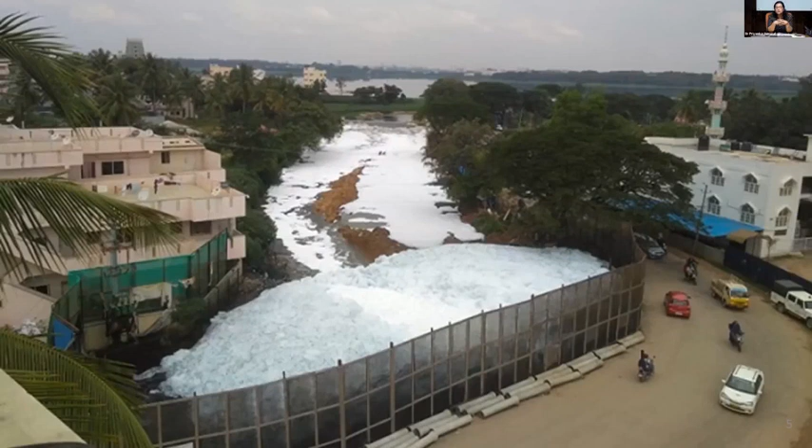In addition to that, the wastewater discharged from the city is used downstream by farmers for irrigation purposes. And we are all aware what kind of health impacts can occur when untreated wastewater, which is a mix of industrial and domestic wastewater, is used for irrigation.

So this is basically the nature of the problem, or the concerning water quality issues, in urban landscapes, taking the example of Bangalore city. Now coming to rural landscapes, what we have observed is that after the Clean India mission, there has been a rampant deployment of

soak pits to dispose of black water, whereas grey water, which comes from bathrooms and kitchens, is not being treated. It is just discharged into open stormwater drains.

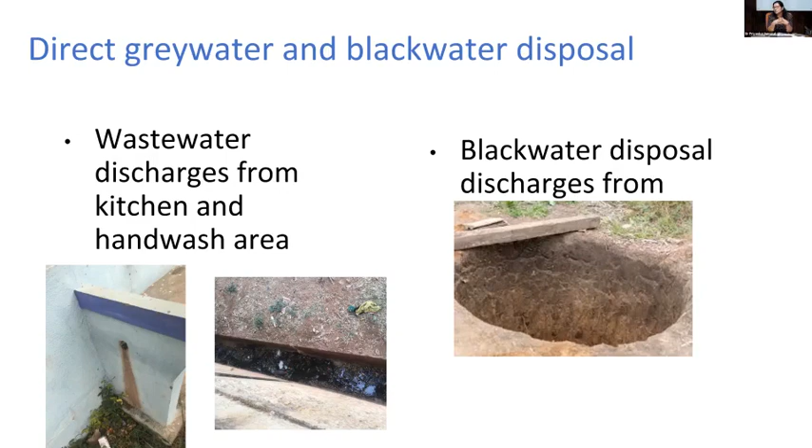You can see here the pipelines coming from households directly discharging grey water, coming from kitchens and bathrooms, into open stormwater drains, while black water is disposed of into leach pits, and the leach pits finally contaminate both surface and groundwater.

And then we see these news reports coming out stating that the groundwater in rural areas is poisoned with nitrate, fecal coliforms, and other issues. So these are some of the water quality issues which we are facing both in rural and urban landscapes.

Then the idea was, what kind of approach can we use to address some of the water quality challenges in urban landscapes? So I will start with urban landscape, and then draw down to rural landscape, showing the demonstration of what we did and how we deployed these solutions to address water quality issues.

So as I showed you, my case study is related to Bangalore city. As I explained earlier, Bangalore had a series of lakes, more than 1,000 lakes. Bangalore city lies on a ridge, and it has 3 valleys, and the lakes are cascading in nature.

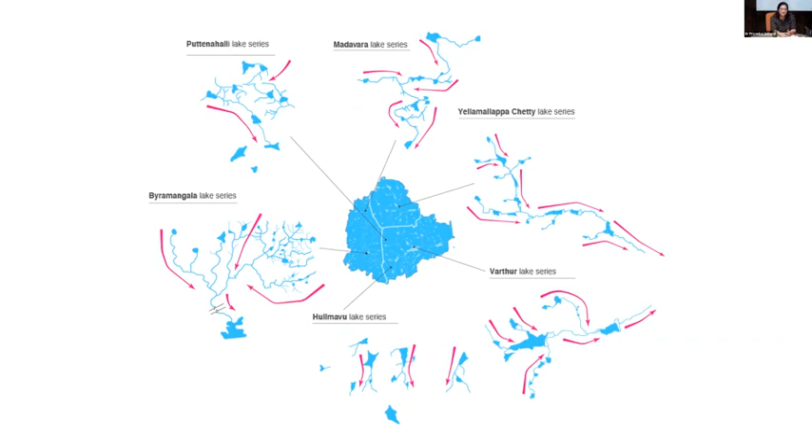So the general response from the government is, okay, let us build another centralized wastewater treatment plant. But the issue with centralized wastewater treatment plants is that construction is very slow. By the time we complete construction, the population has increased by a few million. And they are very site-specific, large-scale, and expensive.

So the idea was, can we have some bottom-up responses where those responses can supplement top-down responses and help in addressing water quality issues?

So as I was mentioning, there are these wastewater treatment plants, both centralized and decentralized, and the effluent from these plants again enters into open stormwater drains, which finally enter the lakes.

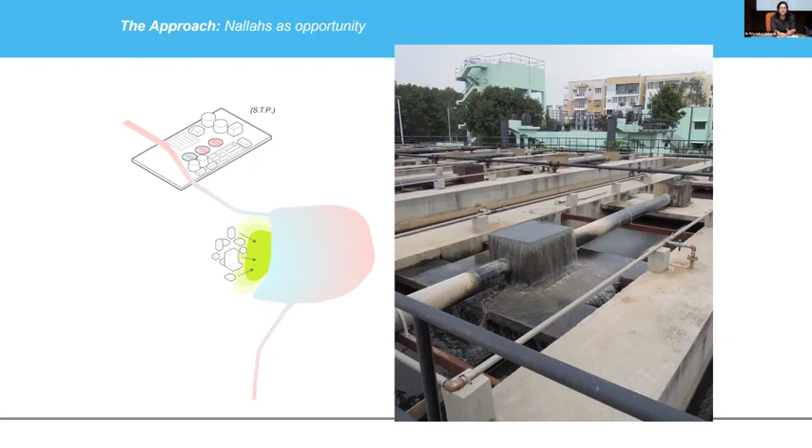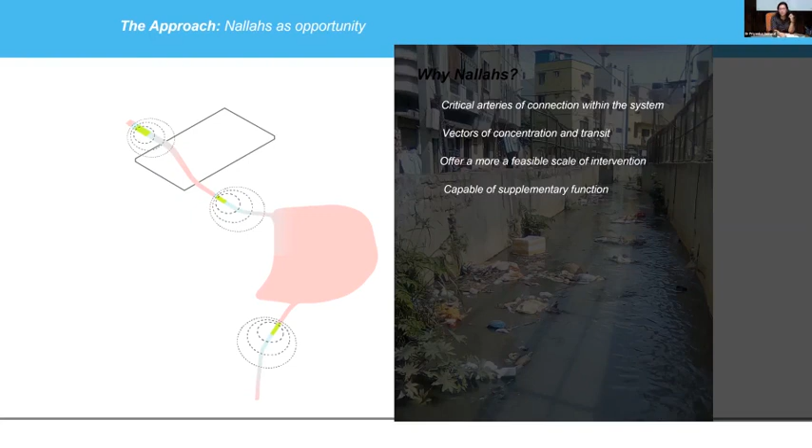So the idea is, these stormwater drains which connect the lakes—can we have some interventions? Can we deploy some interventions at these intersections, which can help in addressing some water quality issues in the lakes?

So the tactic we used was, can these simple in-stream interventions create measurable impacts on the level of contamination within the urban water systems?

Now, they will give us immediate performance. They are flexible, tactical, and can be scaled up. And we want to use cheap materials that are easy to maintain, also with the help of community engagement. So the first thing we did was...

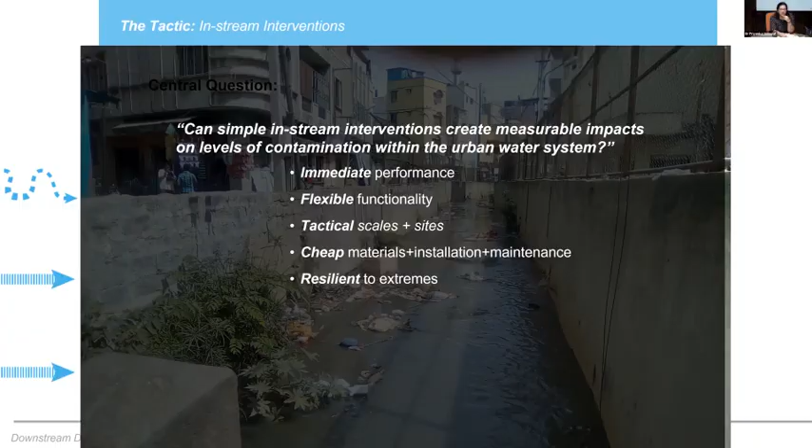So the first thing we did was, we tested—when we say we want to build these nature-based solutions, these interventions—the first thing was, can we test some filtration materials which are cheap, readily available, and which can be used for treatment.

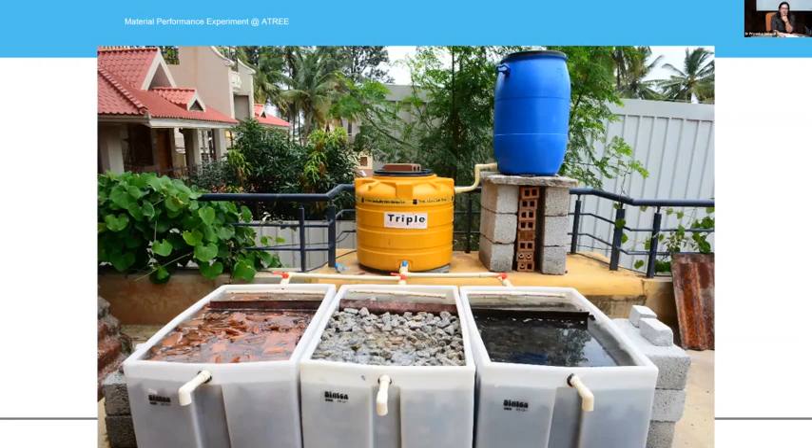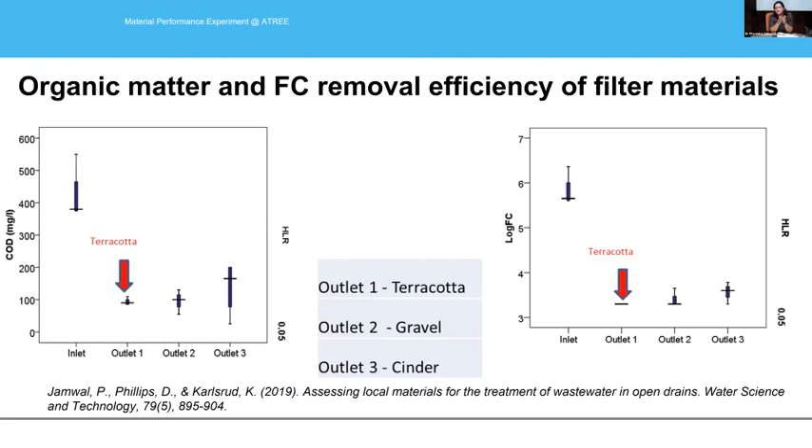So we tested these three materials, terracotta, gravel, and cinder, and we found that terracotta gave us the best efficiency, whereas gravel was giving efficiency comparable to terracotta.

Once we established our work with the lab setups and lab experiments, we collaborated with other institutions and government stakeholders to demonstrate the impact, to have a demonstration site which works under real conditions, because the previous experiments were basically in the lab where synthetic wastewater was prepared and the materials were tested. So now we wanted to test the materials under real conditions.

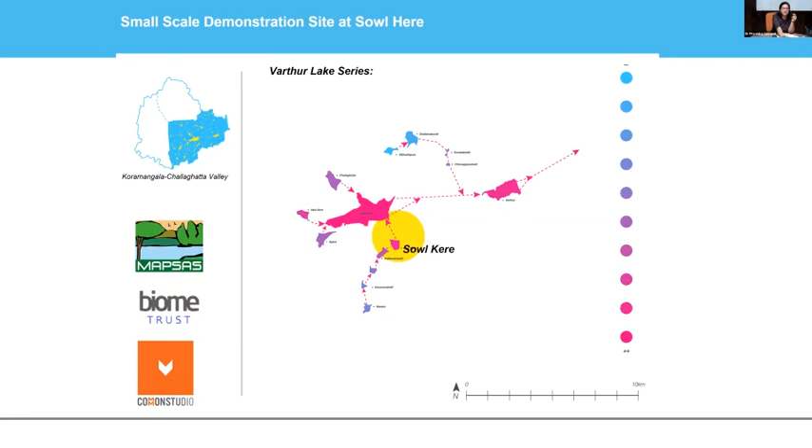So we collaborated with government stakeholders, because we had to seek permission, and we collaborated with implementers and landscape architects. We chose one of the lake series, one of the lakes at Sowl Kere, and did a demonstration. This lake was receiving grey water from the upstream area, as you can see.

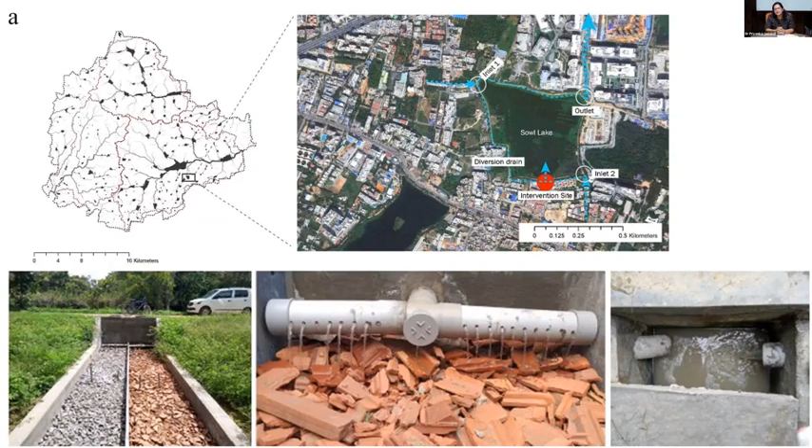So what we did was divert a part of the grey water, and you can see these setups - one with gravel, one with terracotta. We tested this system for 2 years, and the results are already published. We found significant reduction in organic matter content, but fecal coliform levels did not show high reduction because the retention times were too low.

Can we go next, Robin? So, and then next.

The results from this study were used to develop a scenario to test various scenarios at the catchment scale, in one of the peri-urban catchments, where we used the SWMM model to find the optimal locations so that these multiple systems deployed at the catchment scale can give significant improvement and improve the water quality of the receiving lake.

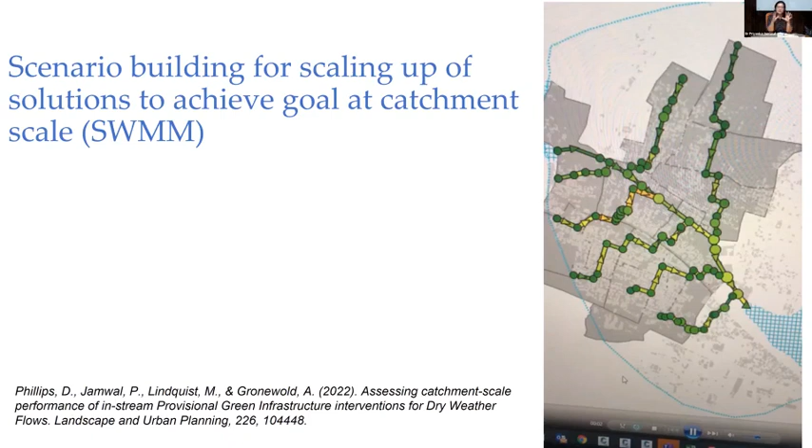Can we go next? So this was the example from urban landscapes. Now coming to the rural landscape.

As you know, 80% of rural landscapes depend upon groundwater for meeting their freshwater demands, and as I've shown previously, groundwater quality and quantity is a major challenge in these landscapes.

For demonstration, this project was in collaboration with the James Hutton Institute and was funded by a Hydro Nation project through the Scottish government. The deployment was done at a school, where the idea was that grey water and black water flows discharged from the school were creating issues with surface water and groundwater quality.

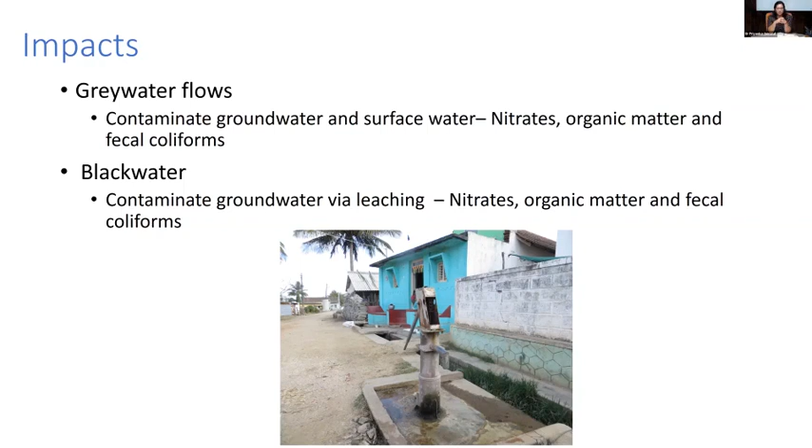We deployed these solutions in one of the schools located near Mysore, a town in India. The school had a population of around 206 students and around 10 staff. The school had issues related to quantity and quality of the fresh water they were receiving.

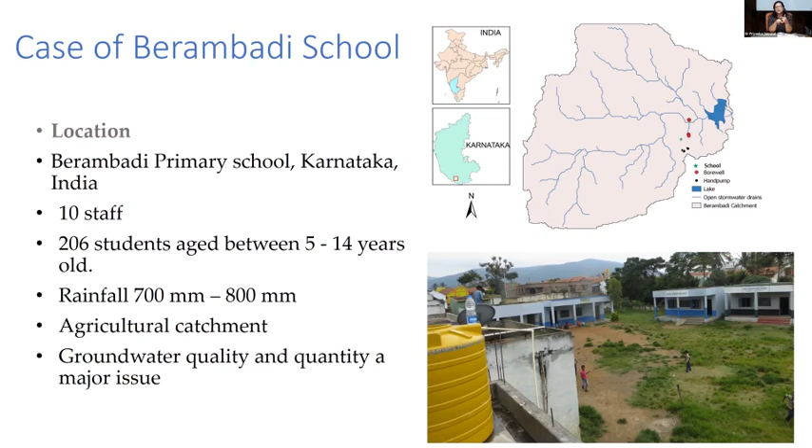So what we did was deploy an integrated water management approach, where the idea was how we can reduce dependence on freshwater sources, reduce pollution of surface water, and also engage the community - because unless we engage the community, sustaining these interventions and their efficiency is really difficult. Community engagement was key to deployment of this project.

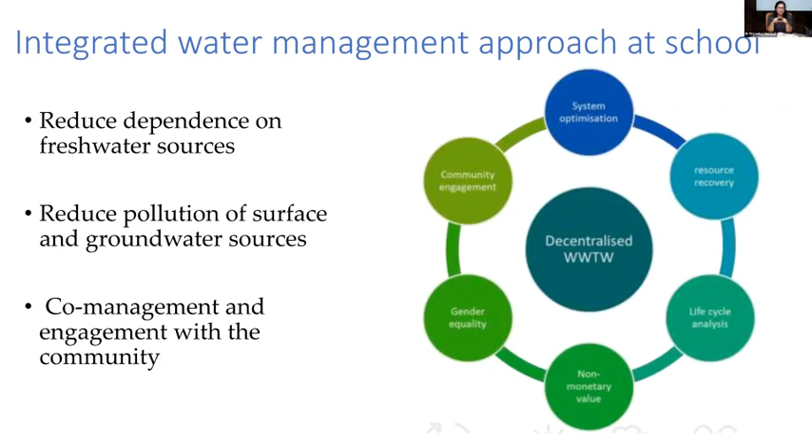The approach we used was that the design of the intervention was guided by a baseline assessment, which had both social and technical components. There was community and stakeholder engagement, and the design was co-developed with children, since they were the main stakeholders. In addition, long-term monitoring was done and youths were engaged, so that the knowledge of this intervention is embedded within the community.

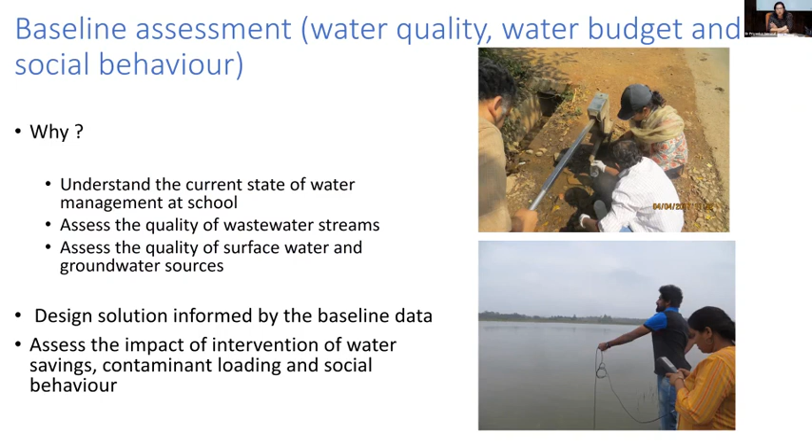For the baseline, we started by looking at the catchment scale, assessing groundwater quality and surface water quality at both the catchment and school level. In addition, we understood the barriers to sanitation through the children - what are the barriers, what are the needs of staff and students - which helped us co-develop the design of these systems.

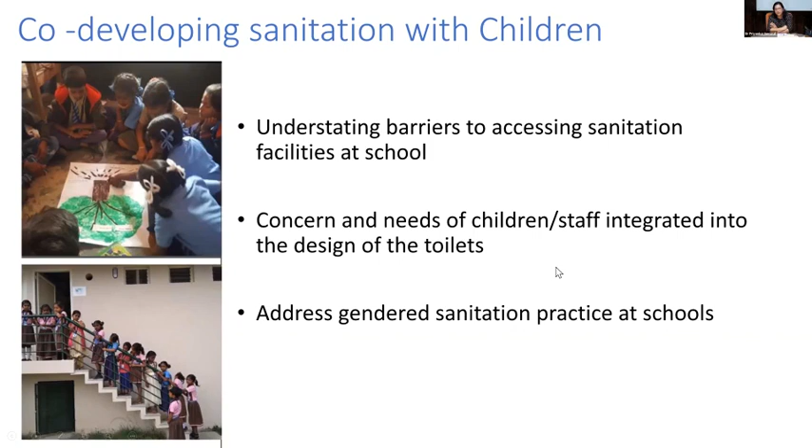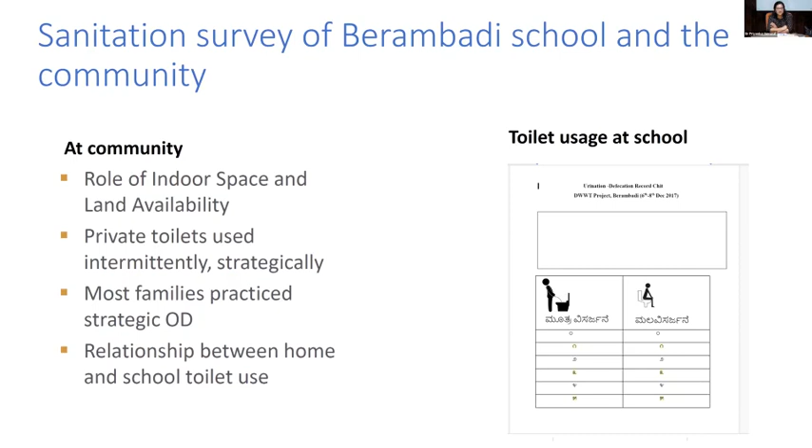We also did a social assessment, because if we want to assess the impact of intervention, it was very important for us to understand the usage of toilets, frequency of urinating, and other key aspects important for designing these interventions. Once we understood the baseline, the data was already published, so if somebody wants a deeper understanding of what we did, you can take a look at this paper.

In addition to that, community engagement was key. We wanted to select appropriate technologies that suited the environmental and social conditions of that particular area.

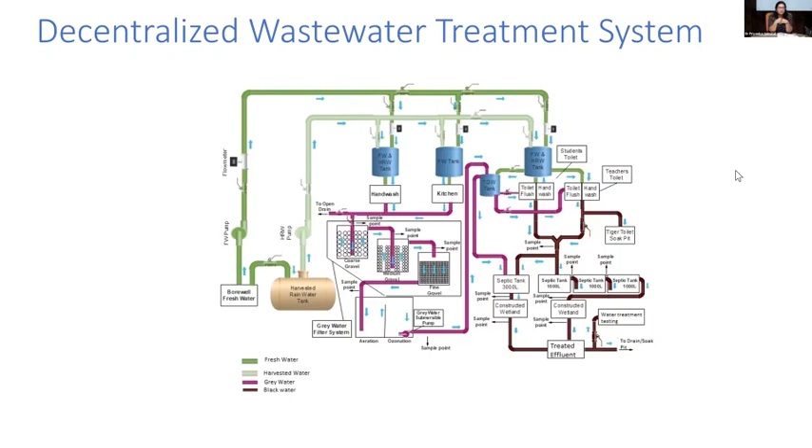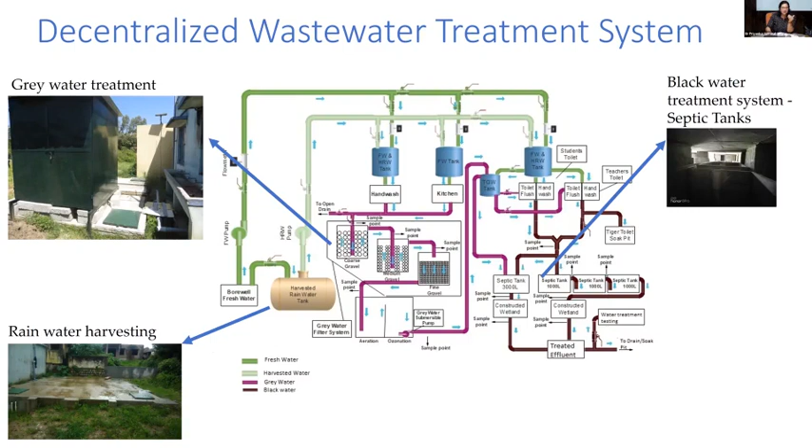For this project, once we understood the baseline, we deployed a grey water treatment system. Then there was rainwater harvesting, because the school was facing frequent groundwater quantity issues. For black water, the earlier school had soak pits, but this was replaced with a black water treatment system, and in addition a constructed wetland was deployed.

For the water treatment system, we used filtration media of different grades. We found that the quality of the grey water, even after filtration, was meeting the discharge standards for urban reuse. The grey water was the water coming from the hand wash and the kitchen wash - you can see these yellow tanks, which are the overhead tanks where the grey water was pumped.

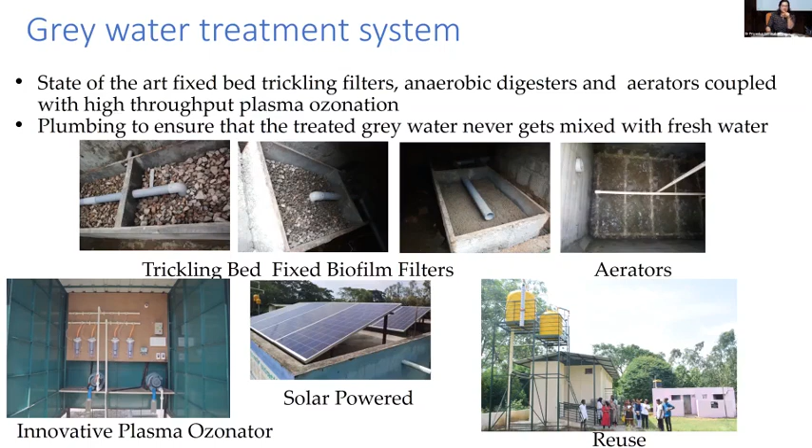The grey water was used for flushing in the toilets after reuse. For septic tanks, as we all know they can only remove 60 to 70% of the BOD, so the septic tank was supplemented with constructed wetlands.

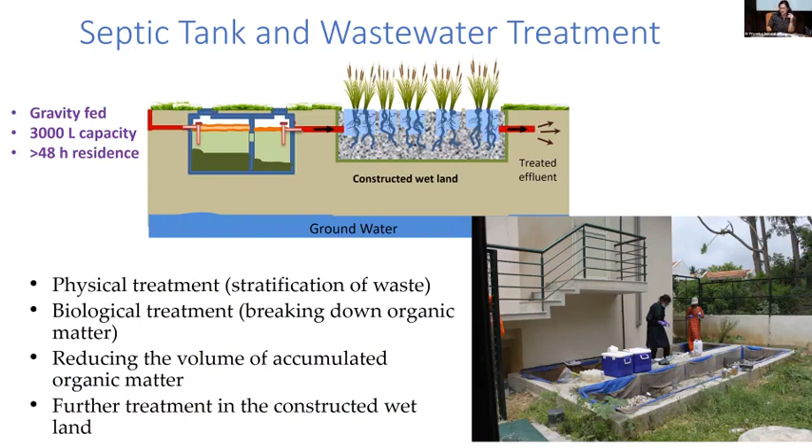This project had two components, the research component as well as the deployment component. The research component tested the efficiency of the system with plants and without plants. For the septic tank, we also had two tanks representing a continuous stirred tank reactor and a plug flow reactor system, to see which gave the best efficiency.

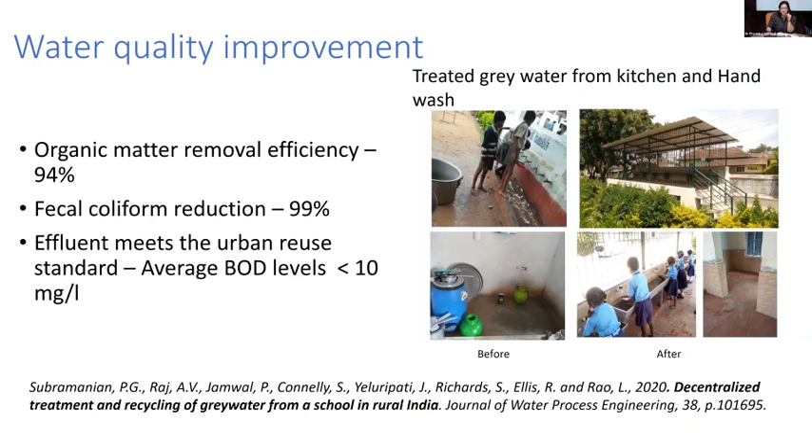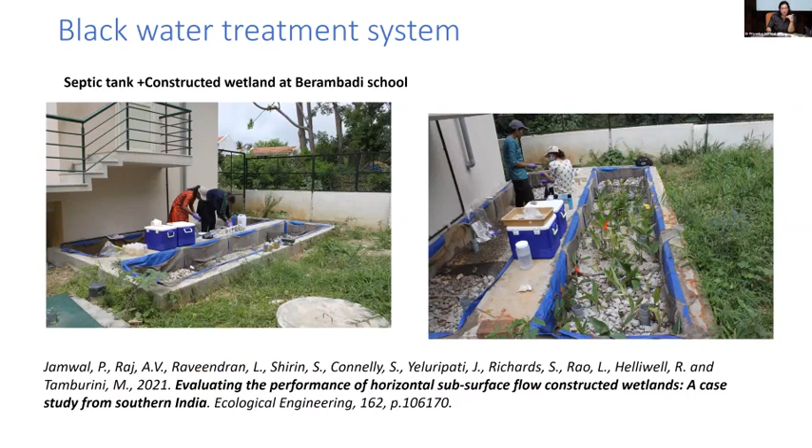We found that the grey water treatment system was meeting discharge standards for urban reuse, with BOD levels as low as 10 milligrams per liter. In case of black water, the constructed wetland efficiency results are already published, and we found the effluent was meeting discharge standards set by the Central Pollution Control Board.

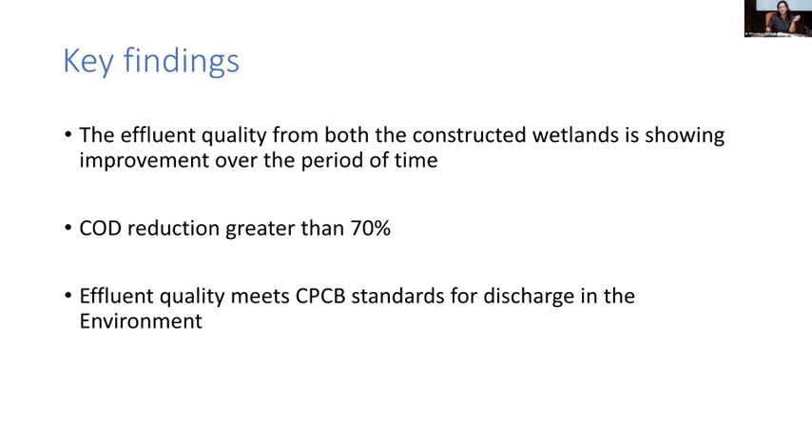There were a lot of questions about why the effluent wasn't reused for gardening or growing vegetables. We deliberately chose not to do that because in schools there is a risk of children getting in direct contact with treated effluent, and treated effluent has fecal coliform, so we wanted to avoid that risk.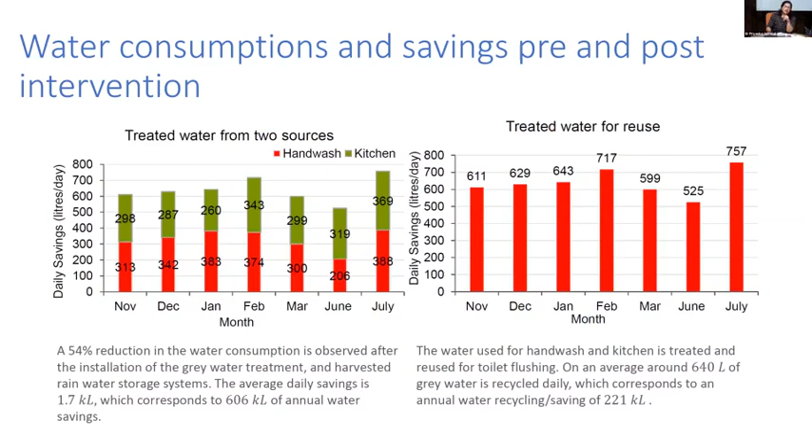In terms of reduction in freshwater use, we found a 54% reduction in water consumption after deploying this technology, and the quality of runoff in the stormwater drain, which earlier carried grey water, was significantly improved. Embedding knowledge within the community was also important, because after we leave the project, we need to make sure the system keeps running.

For that, we conducted a youth training program as part of the social science work, where social scientists formulated a program making youngsters aware of the technologies. They were given skills for troubleshooting, so if the technology doesn't function, they could do a little tweaking and resolve the problem then and there. This was the case from the rural landscape.

As I mentioned, the work should also do a lot of outreach, making sure that whatever we do is conveyed to policymakers and stakeholders through popular magazines, writing in journals, blogs, and social media. Writing in journal papers targets one kind of audience, while popular articles and magazines target a different audience of policymakers and common people.